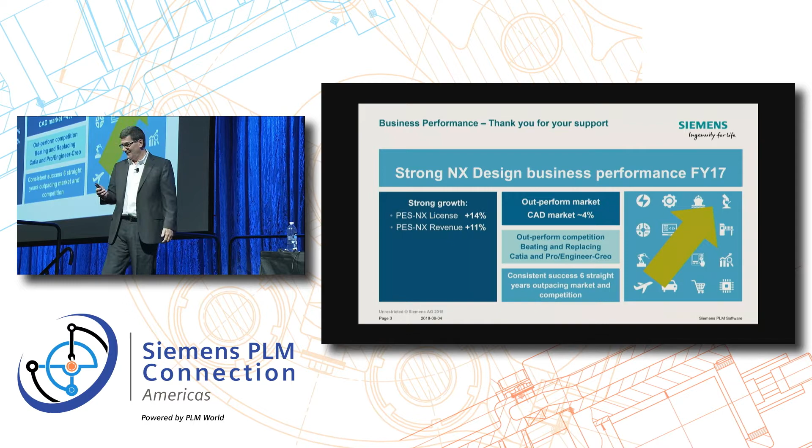I'll be presenting some of our strategic initiatives, and we have one big main strategic initiative that we're announcing at this conference for the first time. And that is, how do we deliver innovation faster to you?

We hear from you that we don't fix bugs fast enough. We don't get the functionality that we talk about at these conferences to you fast enough. And as end users, you just don't see it.

Even if we totally release a new product, on average it takes our customers 3 years to actually see that product. That's too long. There's no app you're using, that your kids are using, where it takes 3 years. They release functionality, they get it that month. You release functionality on Windows today, you get it that month.

So we're going to a whole new deployment strategy for NX that will allow you, if you wish—it'll be optional—to deploy NX continuously. So this is our big strategic change that we're doing, and we've been preparing for it for years.

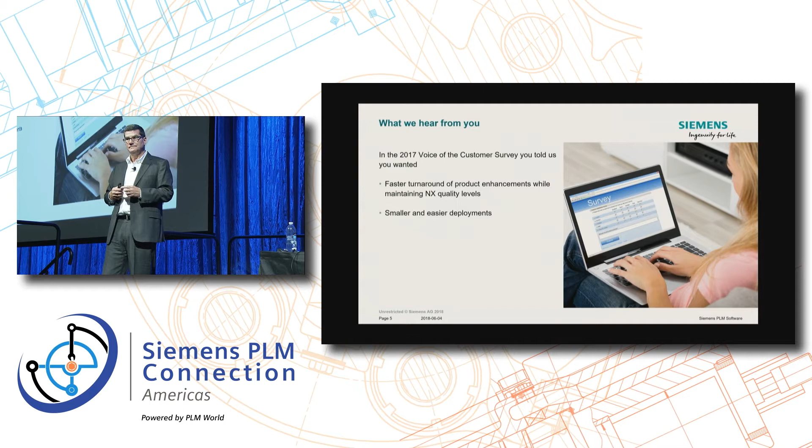Our software development is getting more agile. There are no more MP patches, as we'll discuss. The software just rolls out, just like all other software you're using today. It's backward compatible within a certain time frame. I'll take questions in a little bit, and there's a whole session on this in more detail. This was just sort of the teaser to get you excited about it, learning about it, and understanding how we're actually going to deploy it, and confident we are deploying it.

So, what does Agile mean to you? It's a software methodology, and those of you that develop software know that. But what it more importantly means is that you get functionality faster when it's ready, and you don't have to wait. One of the problems we've had internally is when we have releases every 15 months, if a project is close but not quite ready, it either goes in or it has to wait another 15 months to go in. And then on average, it takes 3 years before that enhancement is deployed. There's nothing agile about any of that.

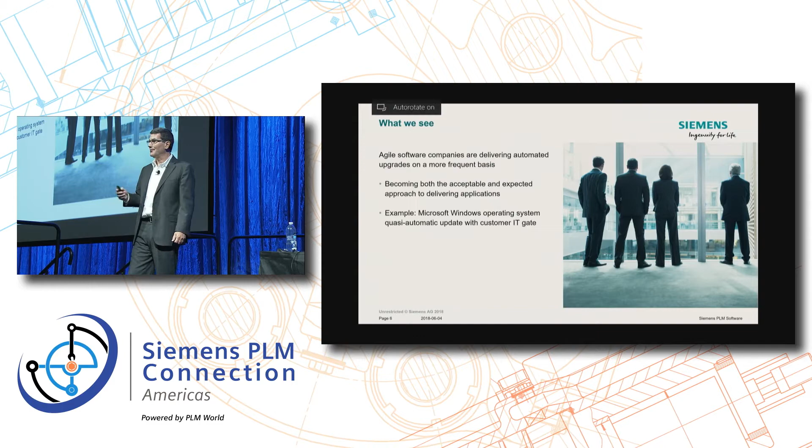What just happened? I don't think I pressed anything.

Okay, so every release of NX will be ready to be deployed. Never think of a 0.0 release. Anything that was at 0.0 quality and not ready to be deployed by 100% of our customer base will never be released. It might be tested by certain customers, it might be released to selective customers on an early test basis, but it will not be released as part of the continuous upgrade. Okay?

NX is not just NX as a CAD system. NX is a platform. All of our graphics applications, many of which, whether you see it in Teamcenter, whether you see it in manufacturing solutions, whether you see it in our CAE tools, are all based on NX as a platform. So this platform methodology will go out everywhere, across all of our tools.

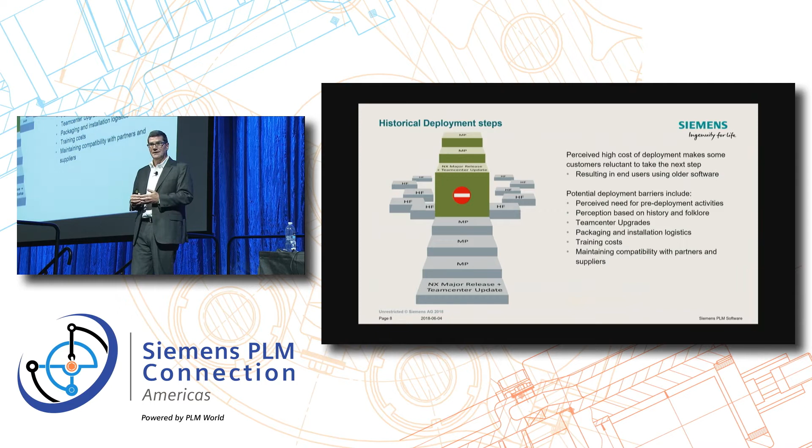But if you want to leverage this change and leverage these enhancements, you can go to this new deployment strategy of our software. And this is NX as a platform, not as NX as a product.

So those of you on NX 10 or earlier, that's half the audience. Do you know when we worked on NX 10 as a development team? I actually don't. What would be your guess, guys? When were we working on NX 10? 4 years ago? 5 years ago? 5, 6 years ago? We released the software half this room is using. When do you think any Amazon software you're using today was worked on? You're using software they worked on last month. Windows 10, you're using software they worked on last month. Not 5 to 6 years ago, right?

So you're missing the work that we've been doing in that time frame. Because of the NX growth, the NX staffing has increased tremendously, so our functionality is improving. We've hired over 100 young people in the United States in the last year working in product development. We hired another 100 in India, China, the UK and other places. So our staffing numbers are increasing, and our functionality is increasing, as you're going to see here really quickly.

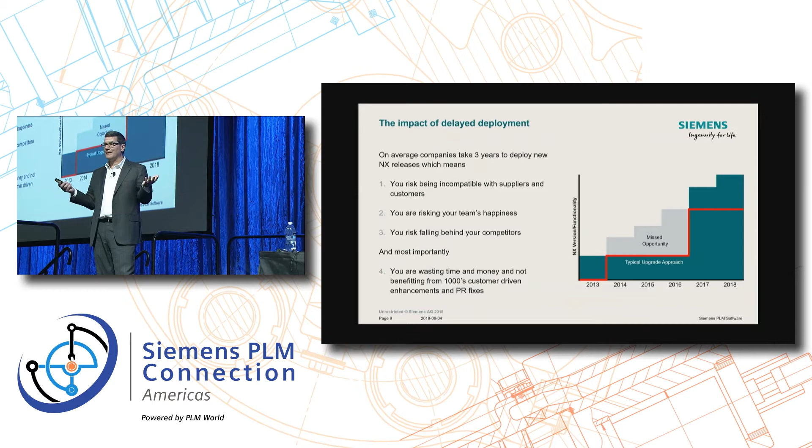So what's given us some confidence we can do this? I want to get some smaller company names here, even though you wouldn't recognize them, just to make sure you know this is really across the industry board. Daimler deployed NX11 within 4 months of its initial release. Daimler's our largest single customer in the world, with the most active seats of any customer in the world. And they're a bit of a complicated customer, for those of you from Daimler here. They deploy a new release of NX every 6 months.

GM deployed NX11 at half the cost of its previous deployment. The GM CIO, in a meeting with us after this deployment, actually had a really funny line that I'll never forget. He said, you know, one of my main jobs is to always holler at our suppliers and complain to them and push them to do better. But you exceeded my expectations here, so I just want to say thank you. It doesn't happen a lot.

Any of you that are not using NX as a product, and you're using NX as a platform and one of our competitors, tell me whether you've deployed the latest release of their software at half the cost. Have you achieved that? I doubt it.

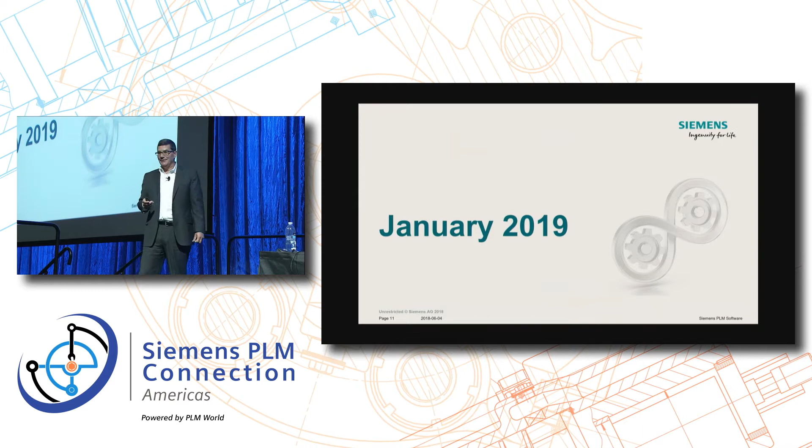So when are we starting this? We're starting this in January 2019. It's called NX Continuous Release. Again, I want to make sure you all realize it is optional. You can turn it on or turn it off. But if you turn it on, you'll get functionality and bug fixes that are certified, verified, and up to date whenever you need it.

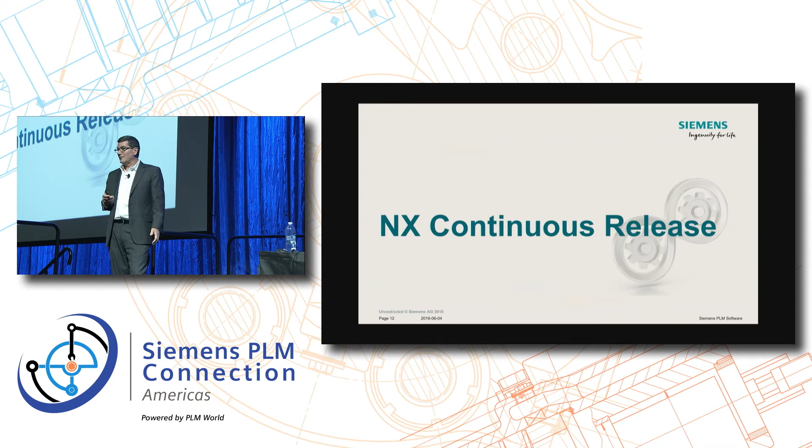So instead of the traditional model, you'll get a continuous step forward. And as long as you get finally to the version of Teamcenter 11.4, there'll be no upgrade of Teamcenter necessary. We will broaden our compatibility with Teamcenter to the absolute maximum that they'll allow us to support. So all versions of Teamcenter will be supported with all upgrades of NX, as long as it's in the support window of Teamcenter.

And what we hope this achieves for you is higher quality software, all releases production deployable. Even if there is a problem, we can go backwards. Continuous release means we can continuously pull stuff out if needed. It's just a much more modern, flexible way to deploy our software packages on a go-forward basis.

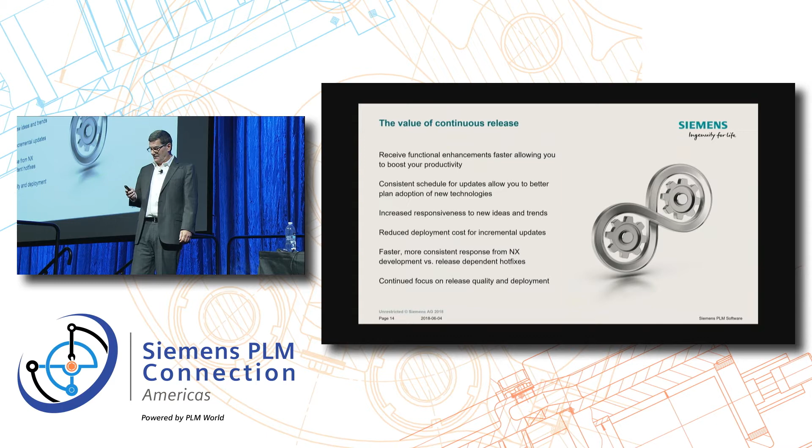And our commitment to you is that we will deliver the highest quality products. I just had an all-hands meeting with our development team in Milford, and many of the people here will tell you the number one thing I drill into all of our developers' heads is it has to be right the first time. If you have any doubt, it can't go out, and you can't just rely on our million automatic tests. You have to really think about the code. You have to really think about the interconnectivity.

That's our commitment to you, that we'll deliver that, and that you'll have an option to go to NX on a continuous basis so you can get the latest functionality as soon as it's available anywhere.

Now, what have we done recently for you in the last year since the last conference? Paul will tell you.

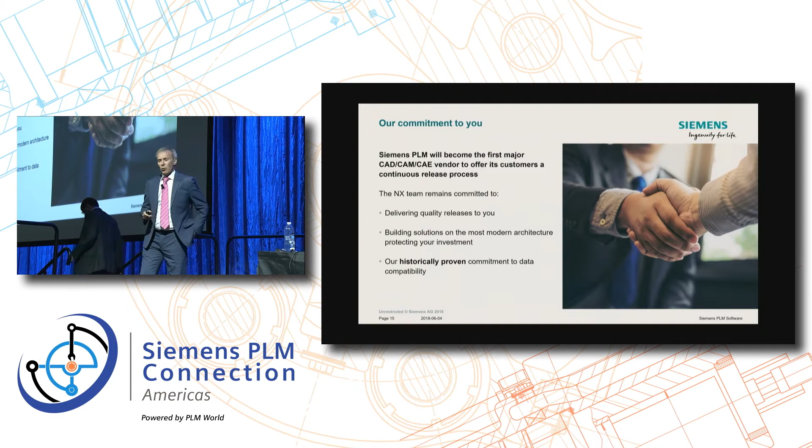Good morning, everybody. It's still morning. So what we're going to do is take you through a few things that you're missing out on based on the show of hands, but also give you a chance to look at some of the values of things we've been working on.

I'm joined by Paul Bevan. Many of you would have seen us present before if you've been here in the past. Also sat down in the corner, being very quiet at the moment, is Sam Kwan. He's going to do something towards the end of the presentation.

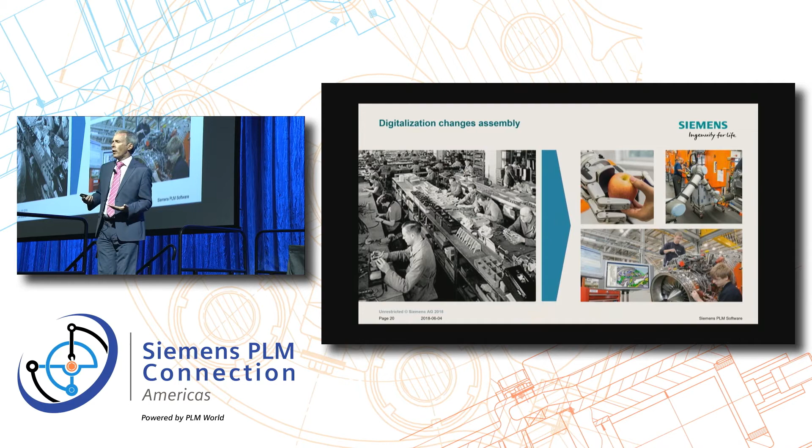Let's go back a little to when Tony presented first thing this morning about digitalization. Digitalization is changing everything in every one of our businesses. Products are becoming more complex, and the strategies of digitalization are changing everything—it's changing verification and testing, it's changing production, it's changing the way you assemble products, the whole process.

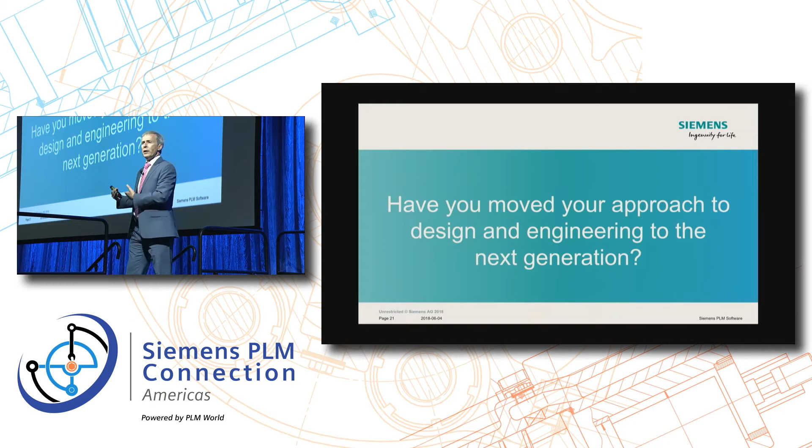So my question to you—it was kind of scary with the show of hands—have you actually started to move your approaches to using software to meet this next generation that you're going to need? If you are still using NX, whichever version, even if it's NX10, as if it was NX6, the answer to that question is no. Because we constantly keep giving you new technology, new approaches.

So let's go through those. The goal really is to meet this platform—Bob mentioned NX as the underpinning platform for graphics and product development, the actual development of the digital twin, building that digital twin model, getting the information into it. We believe there are six key elements that we deliver to you.

We deliver the most productive modeling environment. And we don't just mean one function versus one function—we're talking about the workflows you work on. We are constantly looking at the workflows that you go through.

Multidisciplinary, being able to connect mechanical, electrical. New and emerging technologies like generative design, and integrating the validation processes, topology optimization, those types of tools. Going into additive, keeping this all collaborative using our ties with Teamcenter. And you'll see a bit later some work we're doing around immersive.

One important point we really want to make—one thing we hope you don't go away from these conferences thinking is that all we're focused on is new things. We are committed, and we remain committed, to delivering the core modeling technologies that are the cornerstone of your day-to-day work, and to making those the best and most productive we can.

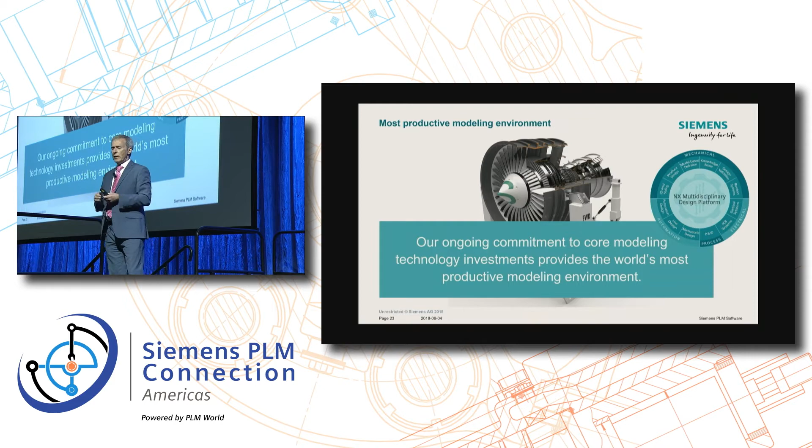In fact, in NX12, we had over 45 patents granted in what was built into it. Some people ask us how many ERs we close. Well, in the NX12 development cycle, there were over 2,300 customer ERs. So for those of you who submit ERs thinking nothing happens with them—it does.

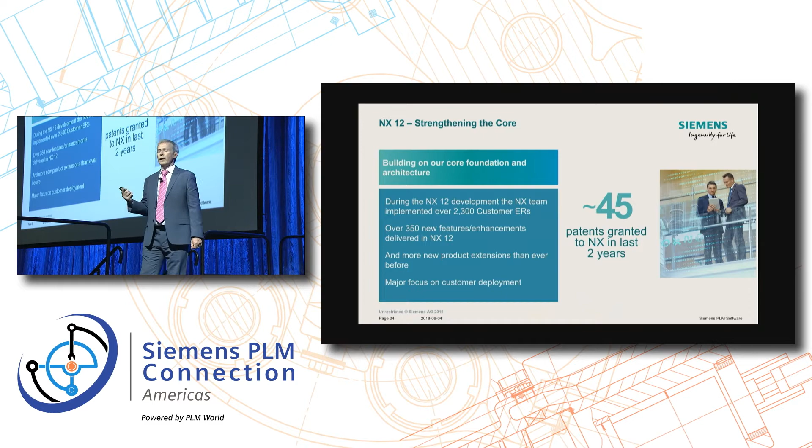We actually go through and track them, and increasingly we're doing more tracking of ERs to make sure you understand when we've addressed them. Well, let's get onto a bit more technology, because it's more fun. Then we'll get onto some demos too.

Assemblies—you would have heard in Tony Hemmelgarn's presentation one message, hopefully you'll take this away. Everyone that uses NX, I'm assuming—I'm almost scared to do a show of hands—how many of you deal with assemblies that are 10,000 components and above?

Okay. Bigger than that? 20,000? Right. Okay, so between 5 and 10? Yeah, so it's a real fair mix.

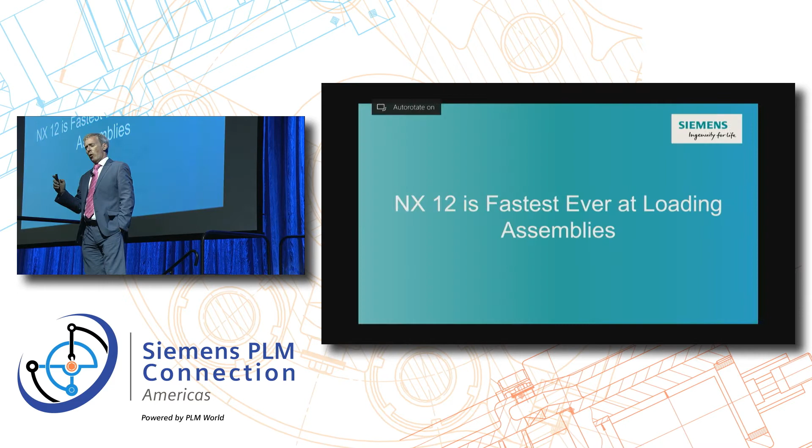So one of the things we've focused on, which we hear quite often, is assembly performance—how quickly can I get into the context I want to work with? Well, we can tell you now that NX12 is the fastest ever release we've had at loading assemblies. Now, that's a bold statement, but let's show you what's going on.

Okay, so we're now over to Paul. Now, one of the things that was interesting is Tony showed you this truck. It comes from an Eastern European truck, actually. And in the background, we're going to load this in an older version of NX.

And we've started the load going. Same machine, we're going to now start the same load. We're going to switch on the option of using the new minimal load functionality. And Paul's pressed load, right?

So we got 2 running. We gave the old one a head start. Remember that? We gave it a head start, just to be fair, we got to try and level the playing field.

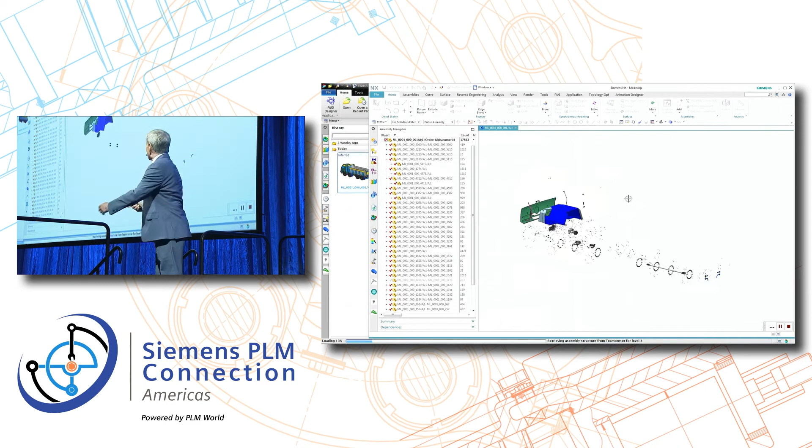Already you can see the navigator's up. You notice the navigator in the back session hasn't even appeared. You can start expanding it. The graphics are going to start kicking in. And then what you'll start seeing... I'm looking at Paul asking, where am I? There we go.

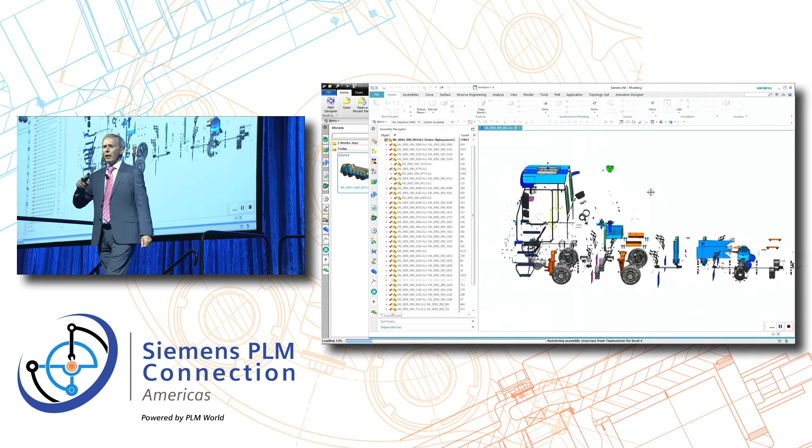So you'll start seeing, but this is not just display. We can interact with the display. We can start doing things. Paul can start selecting out, saying he's not interested in those parts. Let's just hide those. We're still doing the load. This load is still streaming down, but he's now being able to pick information out. He can navigate up and around in the assembly navigator.

Notice the back session, the old session, still doesn't have an assembly navigator, so we've still got some work to do there. It's just going to hide the engine just to bring this forward. We're going on, we carry on.

You can pause the load at any time. You might say, I've seen enough, I've got everything I need. I can pause it and then stop the load at that point and carry on working.

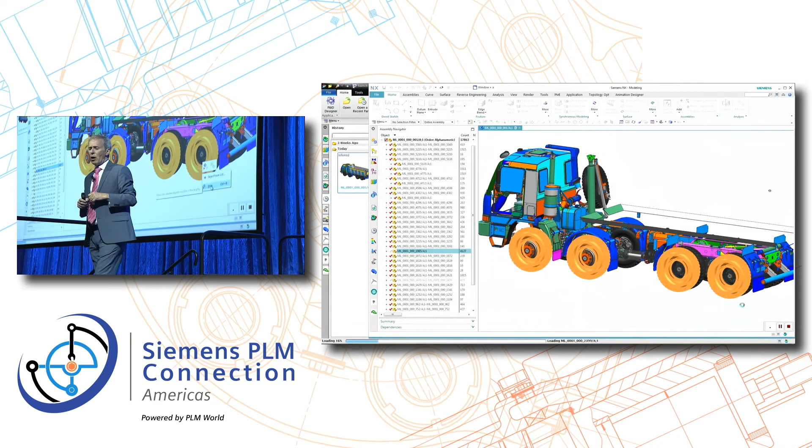Or you can pause it and then go off and do some hide. Paul's just picking these wheels. He's going to hide them, and then he's going to let it go running.

The reason you might want to pause things at times is because, of course, we're constantly streaming information down. So you might be trying to pick something, and then all of a sudden something pops up where you thought you'd just removed it. But anyway, so we're going off and doing this.

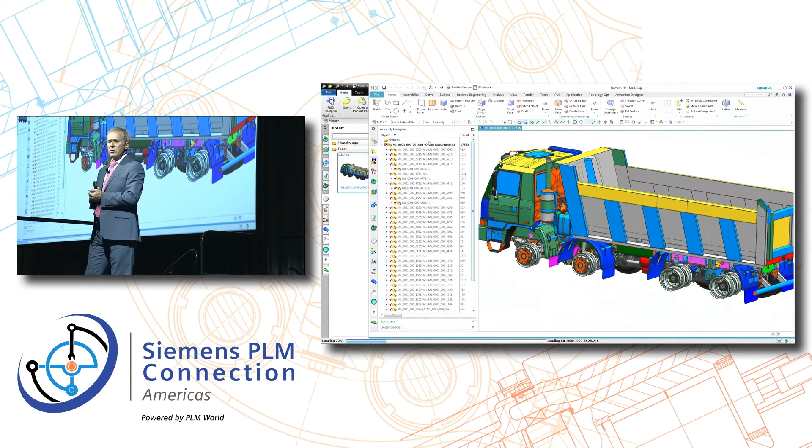So one of the things Paul can do once this is loaded, this is important, right? People are going, well, is it just graphical representation? What can I do with it? Am I just getting this down as a streamed display? Well, one of the things Paul can do at this point, let's have a look at this.

He's just reminding me. One way you could possibly do this is just throw up the outside of things. What you can see, hopefully, as he sections through this, is all the interior detail. We didn't just do a shell around the outside of the assembly and just throw that on the screen. This has got all of the components.

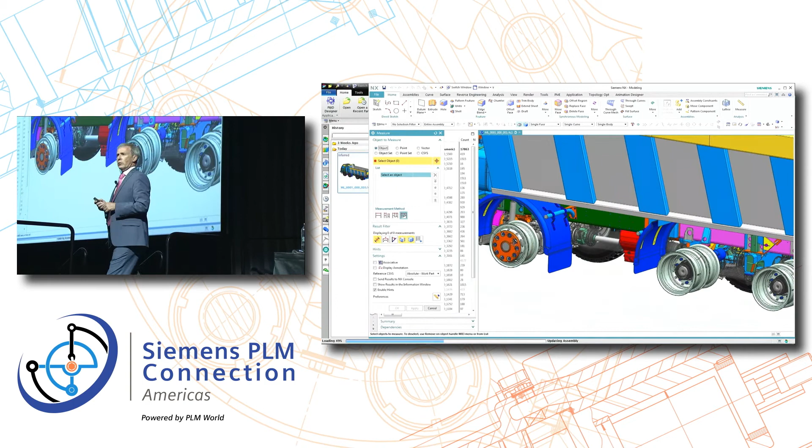There are 860 components there. I've come into his session on screen.

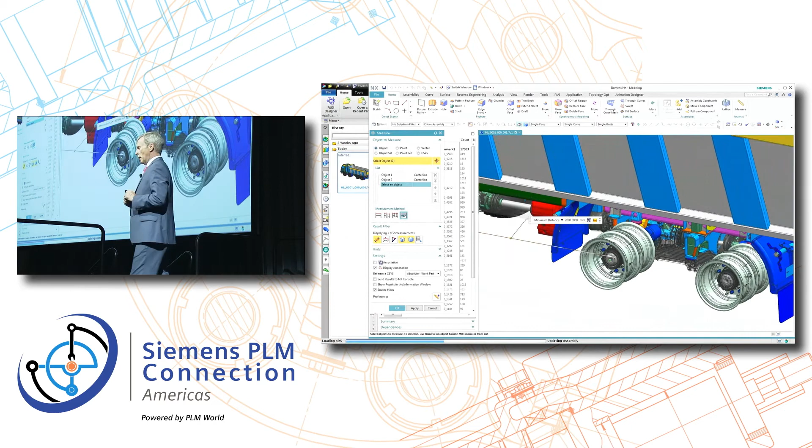And now what he's going off and he's doing some measurements. So he maybe wants to measure the wheelbase. He's using the new measurement functionality that Taylor Anderson would have shown you if you went to his session, the 10 o'clock, 10:15 session. So we've done a whole bunch of work with NX12 around measurement, made it much easier to use. We've consolidated our measurement functions.

One of the things Paul's now going to do is do a little bit of work. Can he actually do some modeling work in this? Well, we're going to go through, we're going to make that the work part as usual, and then just go off and we'll just move this up.

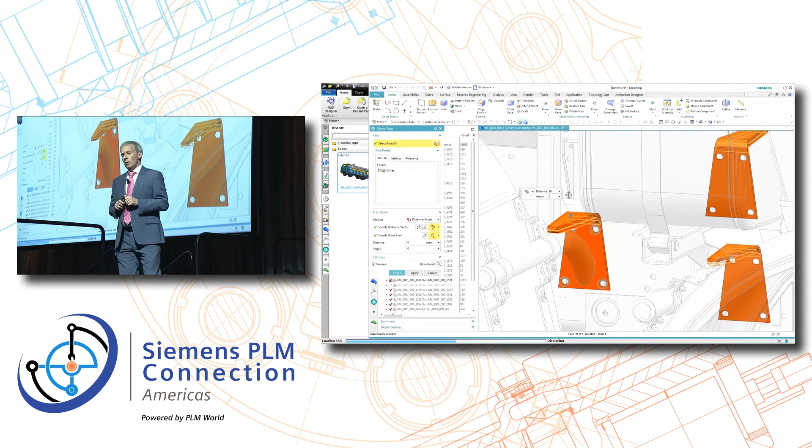Make a quick change. Now at this point, Paul could say save, in which case then we don't have a demo for tomorrow, which would be a mistake. So he's not going to do that, but he can now actually exit this.

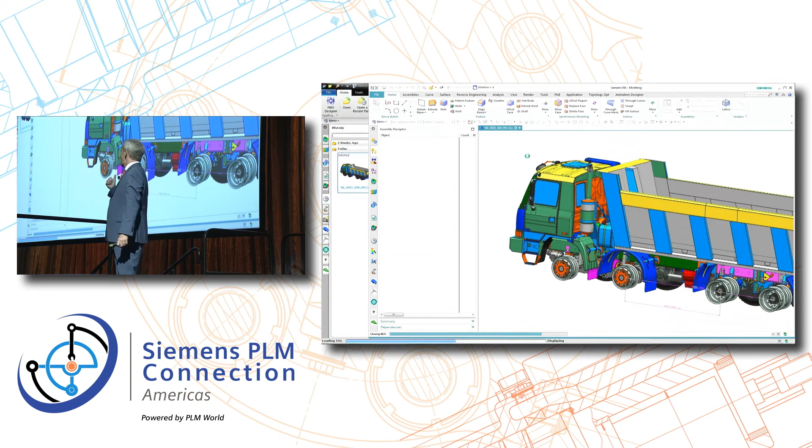So let me just recap. We've loaded all the components, we've blanked some out, we've actually done some measurements, we've done a modification, and the old system still hasn't loaded. So we've done our work, and we're out. So that's why we're telling you NX12 is the fastest ever at loading assemblies.

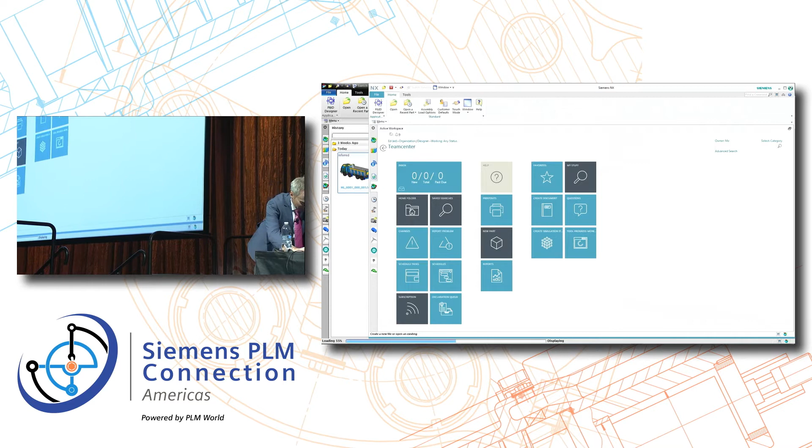Yes, that was live. Sorry, that was a live demo. So, when am I going to get coffee now?

Precisely. Now, we've done other things in productivity, just to make sure you don't think that's all we focused on. So a couple of things we've done—oh sorry, Paul, can you put the slides back up, mate?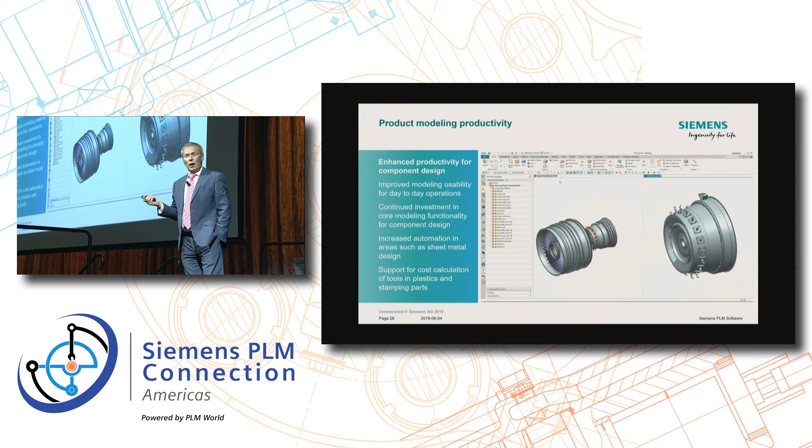One of the functions we added in NX12 was box selection, which allows you to very quickly navigate down. You would have seen—I'm running out of trying to remember when we brought in things like multiple display parts, but we brought that in here. This is showing that, once again in 12. You can see Paul dragging out and reorganizing the windows.

For those of you who think multiple display parts, who cares—how many of you use multiple monitors? Right, so when you use multiple display parts, one of the big parts of that project was to make it work really well with multiple monitors. You have the perfect solution now, allowing you to control that.

Well, that's still working, so I don't bother about that. On my monitor down here, it just told me the one-way control IR blaster has stopped. Tells me something, I guess.

So one of the things you saw was Paul dragging and dropping geometry between windows. He's now using a function for those of you who do sheet metal. In NX12, we added a thing called Multi-bend Bracket—it does what it says on the tin. The idea is to make it very easy to create brackets and support structures with a single command.

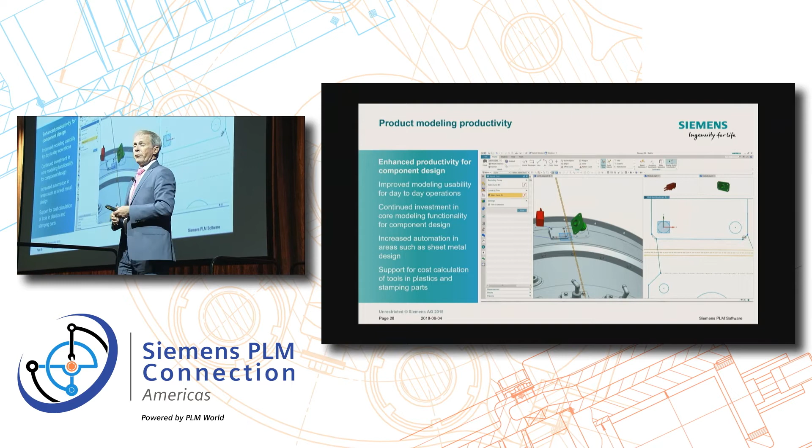What Paul did, when he created this movie for me, was pick up some faces, done a few little bits of sketching, and in a minute you'll see the 3D model get generated—he's done very little work. He hasn't gone sheet metal, flange, another flange, bend, flange. Single command allows lots of wrapping around, and you see the shape all wrapped up, and of course we can unfold that.

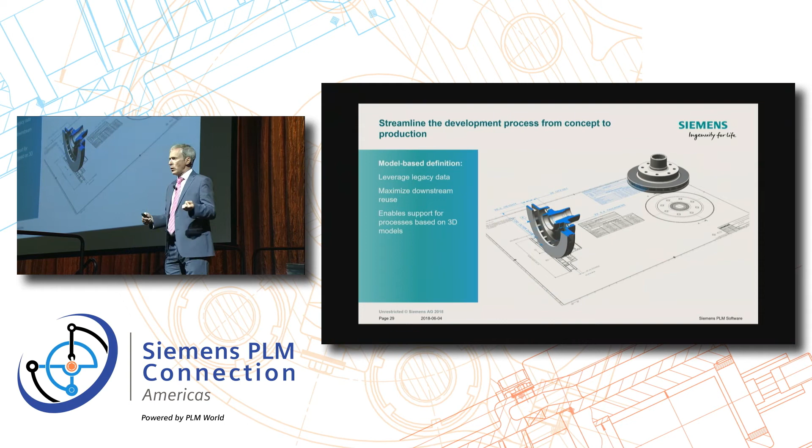We continue to invest in things like model-based definition—our work around product PMI and building in 3D annotation. Dave Wingrave has a number of sessions on that topic, this time with some round tables to continue working on that. Key initiatives.

Now, another thing we've done came out with NX12. A lot of times, my background originally—before I got involved in this—I worked for a machinery company. I trained as a machinery designer. Our machinery moved, it didn't roll around—well, not unless we got it wrong. It was actually bolted to the floor, but the internals moved.

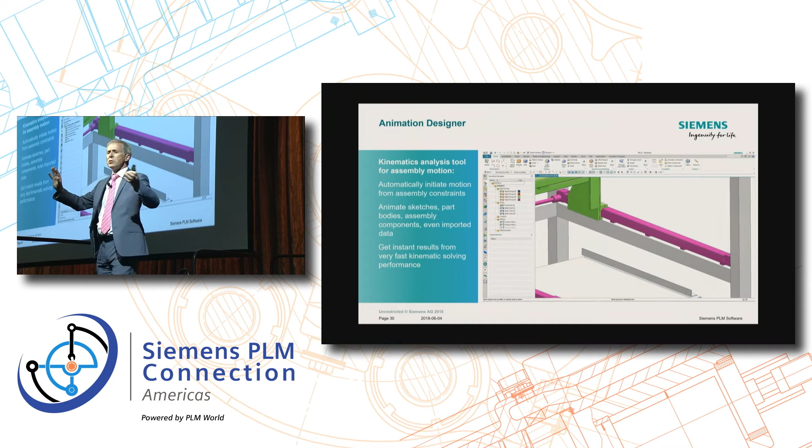One of the things we find with a lot of you is you say, okay, we want to have moving parts, but we don't want to go through a full-blown mechanism analysis. I'm not bothered about it, I just want some simple motion. I've got my assembly structure.

But now we have a solution called Animation Designer. Animation Designer doesn't worry about your assembly structure. You can build up complex movement, do some simple movements around joints and drives, and now you can see it there.

The beauty of this as well is it's time-based. So one of the things you'll see in the movie in a couple of seconds is we get a Gantt chart, and on the Gantt chart we can start sequencing. We can readjust the movement, adjust the speed everything moves in. The idea is to prove out your design without having to go off and do a whole bunch of work.

Defining joints and going into full motion analysis—it allows you to feed NX motion, so you can take this to the next level if you want to do advanced kinematics and then go into structural analysis. You can do this as your first pass motion.

But now you can see this thing comes down, it goes back up again, all just working together. It builds on top, it doesn't take any notice, it doesn't care—your assembly structure is not a restriction. You can build the rigid joints. We will take into account your linkages from your constraints, but also we can build the animation.

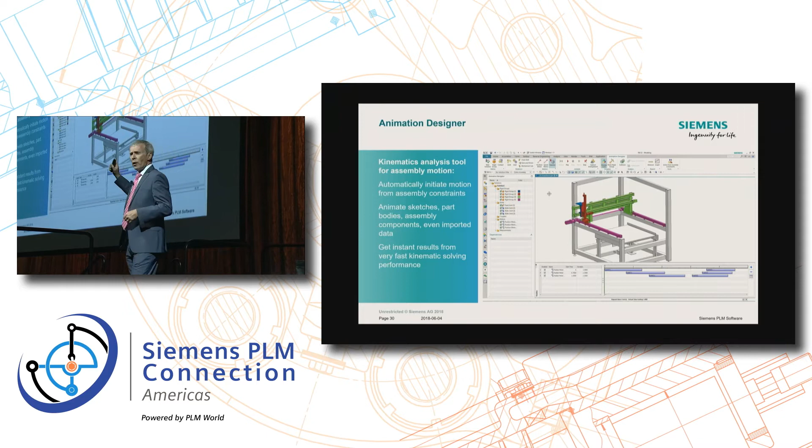Dave Walker, I think, has a session on Animation Designer tomorrow. So if you want to go and see a lot more about Animation Designer, he will cover that.

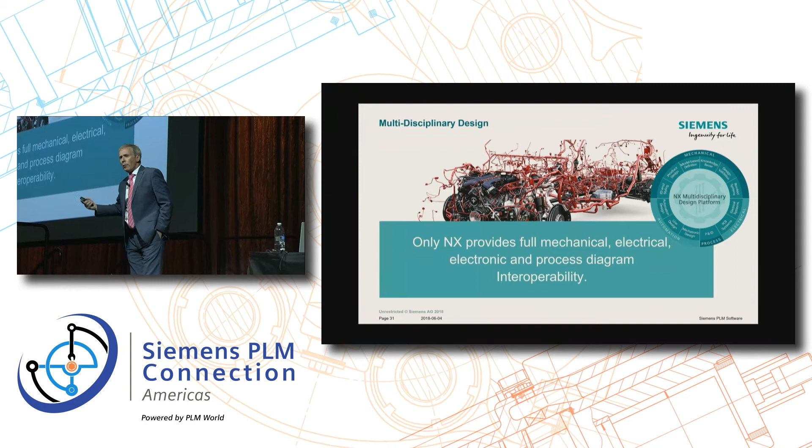All right, multidisciplinary design. Talking about integrating the other processes, not just mechanical design, but bringing in more processes.

In NX12 we introduced a solution for those of you doing energy equipment, plant, or marine design. Quite often when you're doing piping, particularly big pipes, you start life with a process and instrumentation diagram. This is the logic and structure of that 3D pipe. So we've built inside the NX framework a solution for process and instrumentation diagrams, closely coupled with the routing, so you can cross-probe and validate that your runs are correct. That takes it into that type of world.

But that's more process or industry orientated. We continue as well to look at electronics, tying together MCAD, NX with other tools to complement solutions like PCB Exchange, which allows you to communicate and pass PCB boards and layouts backwards and forwards.

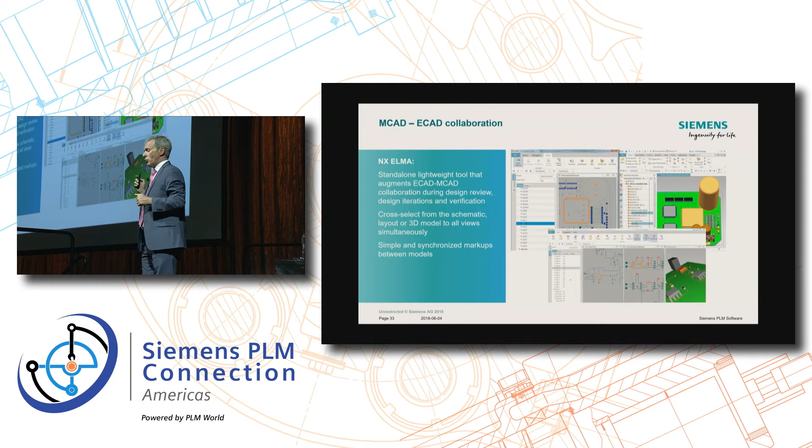We've introduced a new product called Elma. It's an interesting name, but you can ask Mike about that one. It sits outside of NX and connects between the PCB system, schematic system, and NX, allowing cross-probing and validation. It lets you check out your entire workflows. Dave Walker's got a session this afternoon where you can go see a lot more about the electronic integration.

Last year we introduced the first step of our electrical integration with the Mentor tools, the capital harness tools. We've continued to invest in that, bringing those two products closely together, giving you solutions which tie capital harness with its logical layouts and schematic into the 3D route inside of NX for your wire harness. Very close coupling such that you can cross-probe between each other and track information, track where signals go.

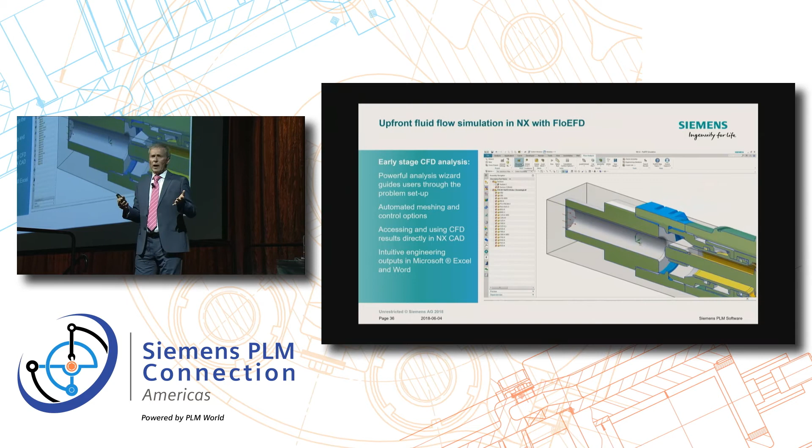Moving on, in that same area we have a solution. One of the things that many of you, if you're into anything to do with fluid, or if your products have cooling properties, quite often you need to worry about airflow or fluid flow. That's traditionally been the domain of analysts using CFD packages, and yes, we have products like Star CCM Plus, which are very high-level CFD solutions. However, there is the need for a designer-level tool.

So we're pleased to announce that as part of the partnership with Mentor, we are offering a product called FloEFD for NX. FloEFD is a wizard-type approach, embedded inside of NX, inside the design environment. You don't have to care about meshing or all that complex stuff. It does all that, and allows you to define.

In this case, we defined pressure at this end, out to atmospheric pressure. You can see all the flow curves, you can see where there are dwell points, where the liquid is going to slow down. So there's lots of capabilities to allow you to validate at the first pass—an early validation of fluid properties using a really simple interface within the design environment. It's not designed as a high-end analyst tool, it's there for you as a designer.

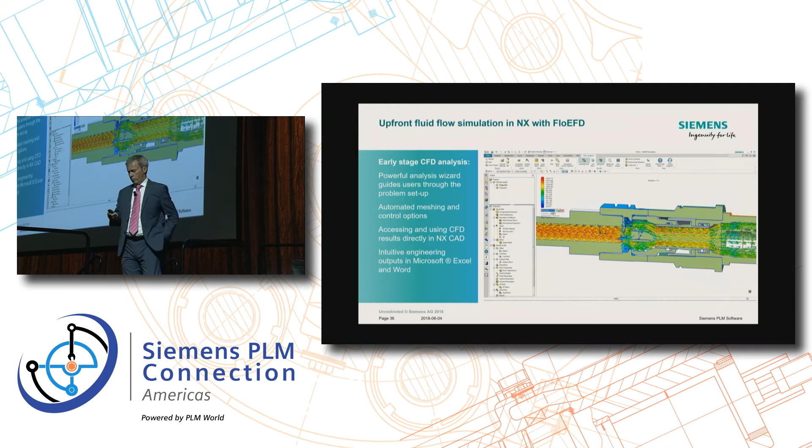Trying to work out if everyone's shell-shocked yet and how much more I can bombard you with. Okay, let's carry on. So, generative design and integrated validation: the ability to allow the system to help suggest potential designs and give you some options to work with. We've really been focused on a workflow.

As Tony Hemmelgarn mentioned this morning, just having point solutions, just having individual tools, that's not really where it's at. To be productive, it's the process that we have to connect together—from having your requirements, going through and doing your optimized design, making modifications and updates, right the way through to final manufacture, in one system without data translation.

When Tony told the Bugatti story—we'll talk a lot more about that tomorrow morning in the Jim Rusk session—one of the key things they wanted to do was keep in the same system and not translate data. I'll say this repeatedly: even if you get a niche system and they say we have a free NX translator, free is not free. There is nothing in life when you translate data that is free. There's always work to validate. Keeping in the same system with all the connections is the way to go.

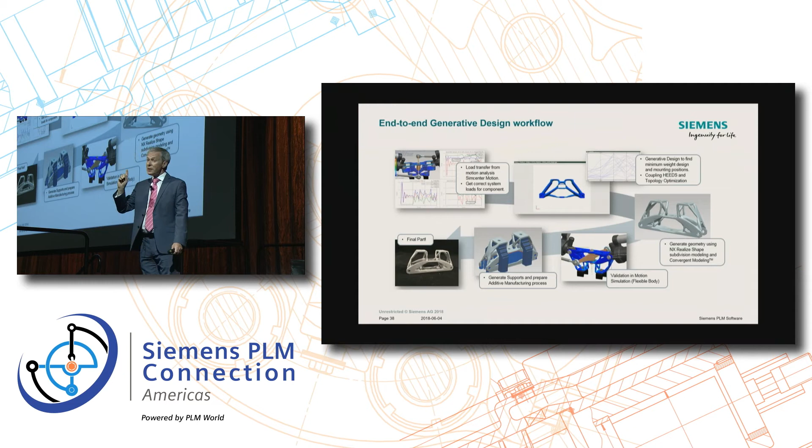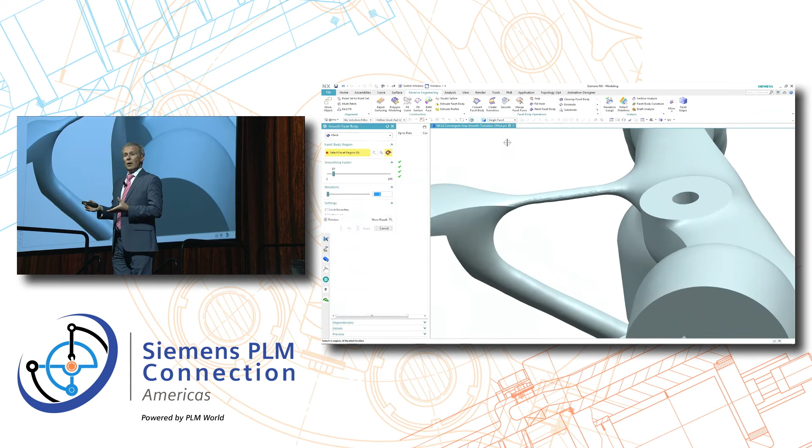So we're going to a demonstration. We're not going to take you through topology optimization itself, but we'll talk about what you can do with the results. Topology optimization brings out a facet body. For those who've been around a while and keep an eye on our messages, one key element is convergent modeling, which allows you to combine facet geometry and B-rep geometry and work with it. We've done a lot of extra work on how you can handle facet geometry and all these millions of triangles.

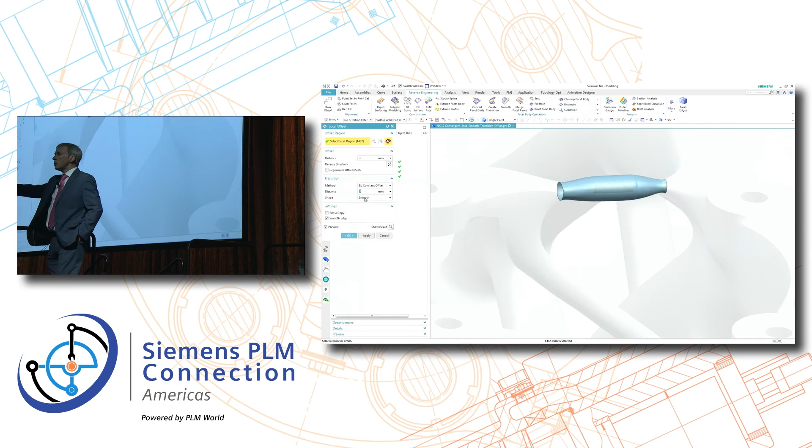One of the things you'll see is Paul going through this very thin area in the topology optimization, offsetting it and bridging it into the shape. We haven't done any conversion here—this is still working with facets. He hasn't actually changed the geometry. This is speeding up the whole process of taking your geometry, whether scanned or topology optimized, that's in facet form, and getting it into a shape you can do more with.

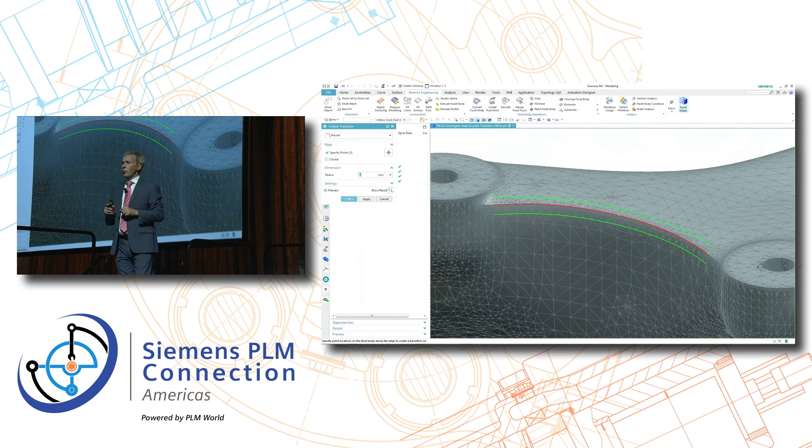In this case, Paul's going to add a transition—like a blend type shape—to take that sharp edge off. Everyone wanted to blend a facet body; you bring one in and it's pretty ugly. Notice he's got drag and drop for the points. He's just going to go through and make a nice, smooth transition on that edge. There we go—pretty cool, that one.

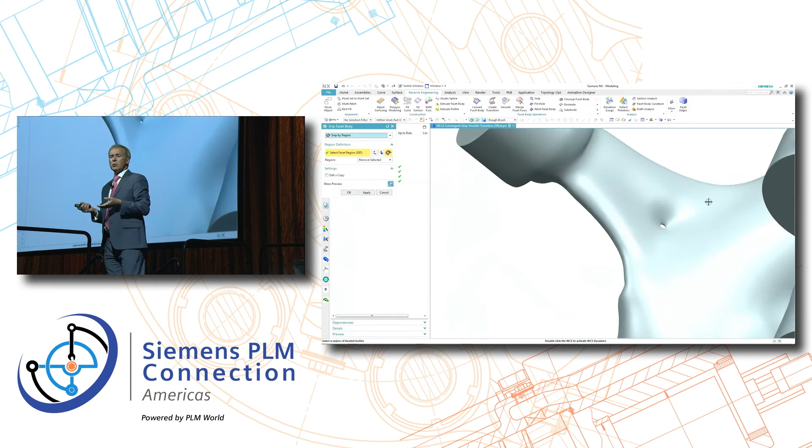Now, this happens quite often when you scan geometry. It also happens quite often with things like topology optimization, particularly if you've got a weight calculation. Because to get weight out, one of the things you can do is put some holes in areas. But that little hole will just be an absolute nuisance.

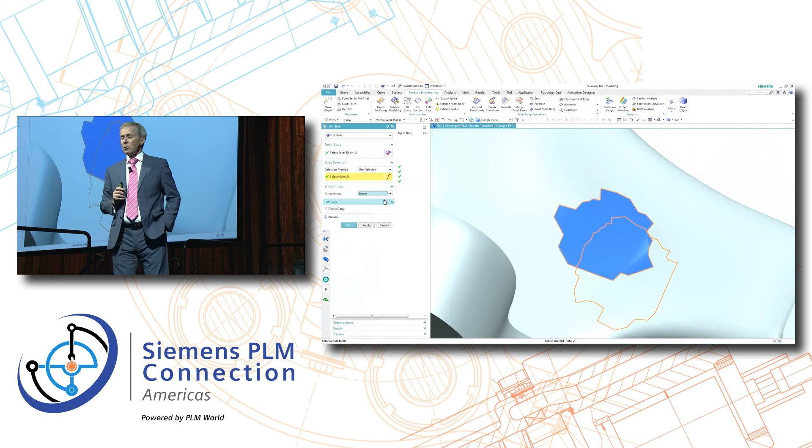So Paul's using a technique called paint—he's painting around the facets around that hole he wants to get rid of, and then he says snip. Now, at that point, every one of you thinks he's made it much worse. So what he's now going to do is fill the hole. He comes in, says fill, picks the two spots, and says make it all go smooth. Sure enough, the hole's gone, and he's got something much more useful.

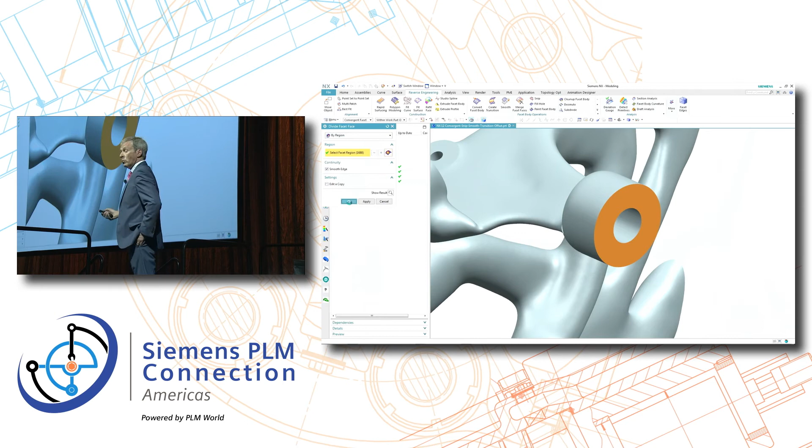One final thing on this one—this is a bit of fun. This edge is like a hard edge, pretty much cylindrical. So what Paul's done is divide the facet body up such that this is now a hard edge. And guess what he can use to make this look nice? Edge blend—the same edge blend you've been using for years. He doesn't have to worry about it; if it's a complex facet, we have the transition tool, but for a hard edge on a facet body, regular edge blend will work too.

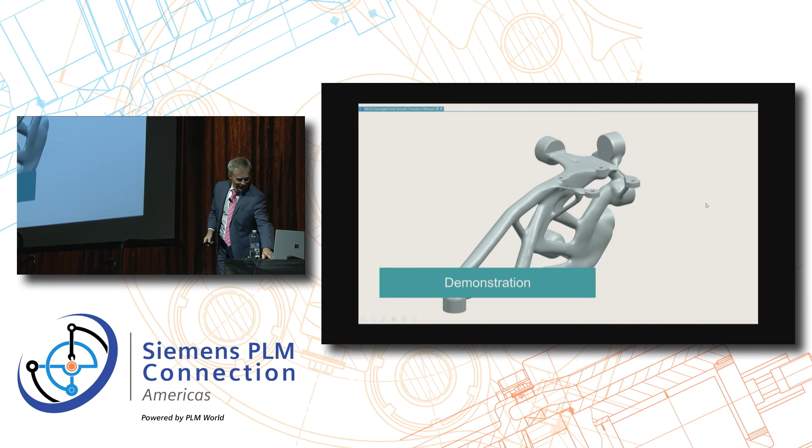So the whole idea of that was to make working with this type of geometry much quicker and much faster. Let me get rid of this. Is that live? Yeah—so Paul's pressing away quite nicely.

All right, design for additive manufacture—we'll talk about this a little bit. As I mentioned, the whole idea of our design process is to try and tie this together into a single system.

You can go find lots of niche systems that do individual parts of the additive manufacture process. Our goal is to give you a single solution such that when you make changes and new designs, they ripple through - a single solution, no translation, being able to work on things. I have wizards that are DFAM checks to make sure that what you're designing can actually be printed and manufactured, but also extra tools.

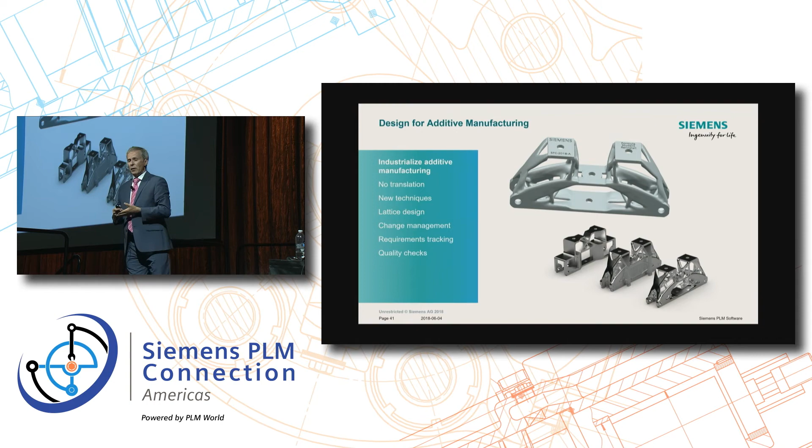So we're going to do back to another live demonstration.

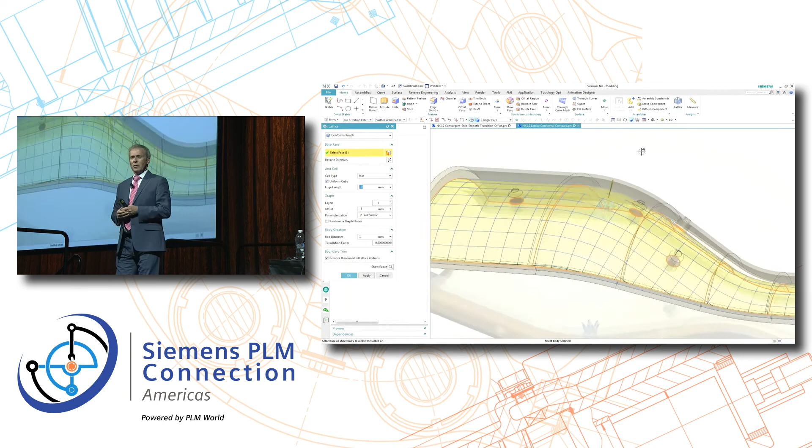One of the favorite things anyone talks about with additive, and one of the benefits, is this topic of lightweighting - being able to take volume out. Now, it's not just as simple as making it hollow, because that takes volume out, but the trouble is that impairs structural integrity. So what you want to do is take volume out and maintain structural integrity.

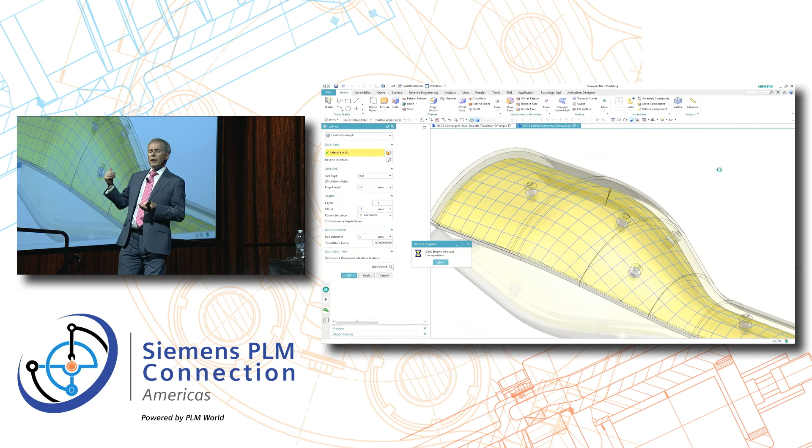So what Paul's done is he's picked that yellow surface in the middle, and then he's said, I want to go through, and he has a choice of lattice structures he's gone through. You'll see this grid that's come on here - this gives us the layout. In NX11, we introduced our first pass of lattice, and it was a unit lattice, so it was great on things if you wanted it all to be a regular shape, but on something like this, which was irregular and formed, it didn't help you. So now in NX12, we have conformal lattice, and you can see the structure.

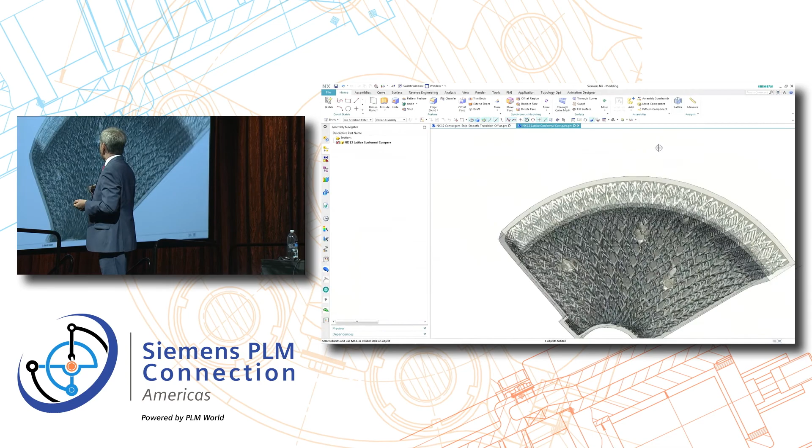Anyone want to have a go at modeling that individually? No, so I didn't think so. So you get this whole idea - we're giving you that tool inside of NX.

No translation, being able to then take it into the next stage of the process, go through, do your slicing, do your support generation, do all the work you need to prepare this for print. And I hate to imagine how many faces there are on that lattice, but of course the benefit is it's a facet body - and how do we use facet bodies? Convergent modeling, so we can combine it with our regular design.

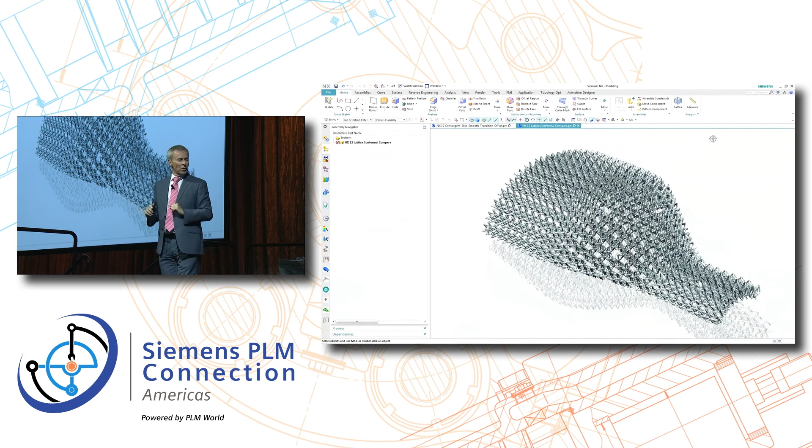All right, we're almost there. And it's almost Sam's big moment.

One other topic that is very popular at the moment, and when we talk to customers, is where are we going with virtual reality? Additive manufacturing is one big topic, and how can I get the benefits of virtual reality in my design? So we've been working on this - it's due out in July, a couple months' time.

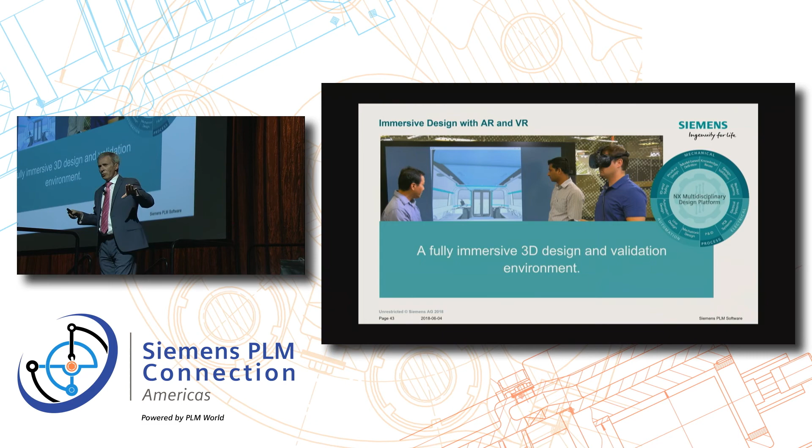So we have Sam here, and he's got his VR equipment stood down there - unfortunately there's no light on him. We're using the HTC Vive. Now what you can see is the Local Motors Olli, which is a mass transportation autonomous vehicle. The Olli itself is in the exhibition area, and the hardware will go down to the exhibition area after we've finished, so if anyone wants to come have a go at this, be our guest.

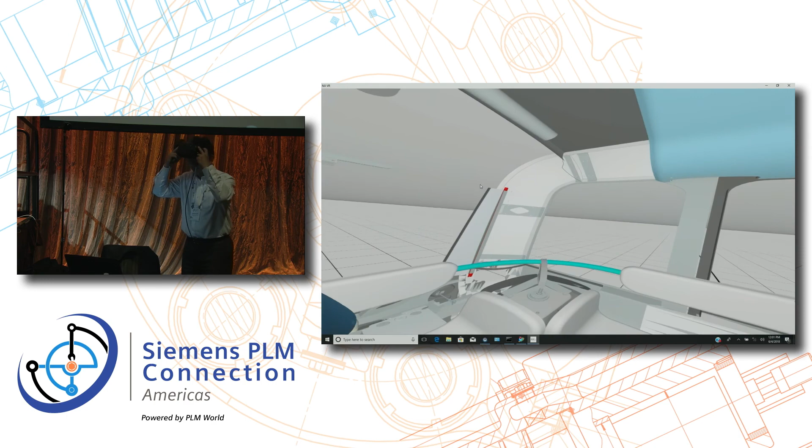Now you've seen that. Sam is just going up, and you'll notice we've added a straight switch. We don't want you to translate data out - what have I been saying all along? Trying not to translate and force you outside of NX. So inside of NX, we've gone there. Now at this point, we could all leave the room, and Sam has no clue that we've gone, right?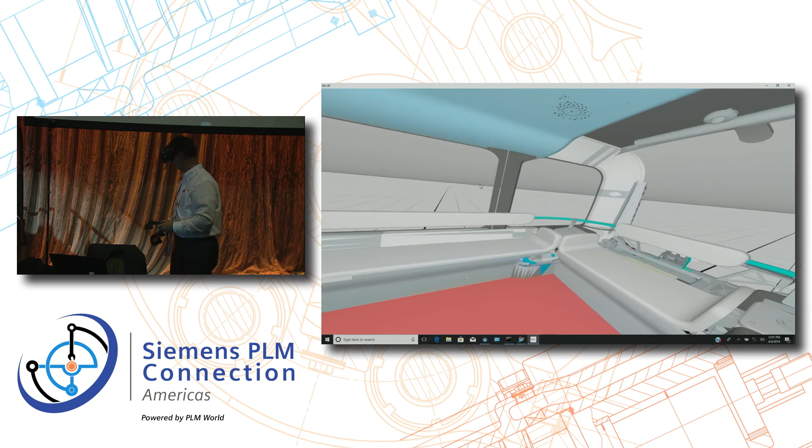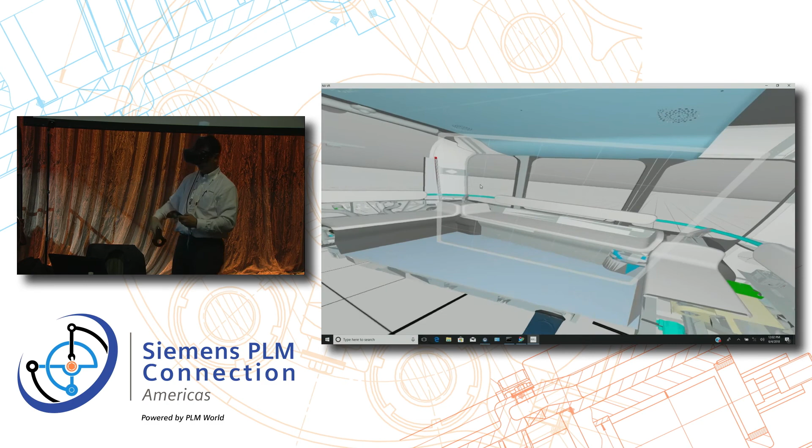But anyway, so what you can see is what Sam can see. So actually they've kind of got him up there. You can see he's gone in and he can move around. You can see what he's doing with his left and right hand - he's navigating around, he can pick things, he can do things like sectioning. He can go inside - so we're actually inside the Olli, and now we're going to go down. He's going to pick something, and you'll see the pop-up menu come up, and he's going to run a section plane through the process, so he can actually highlight areas. He can pick components and then go and interrogate more information, looking at going inside of his environment, picking one of these components.

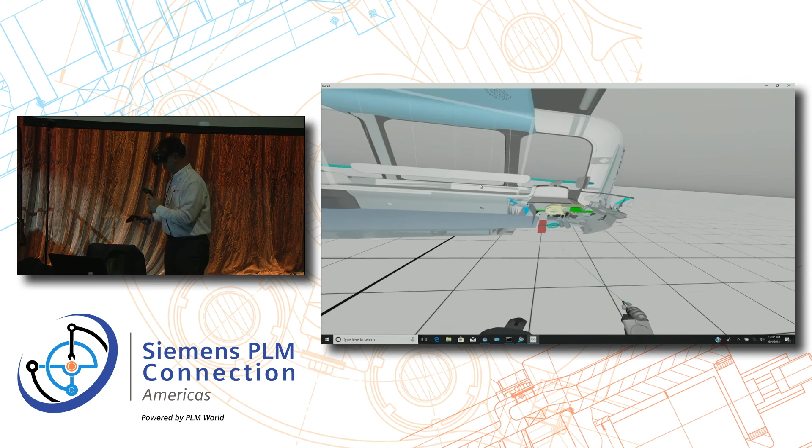You can see a tab comes up. It has things like part attributes, part number, materials you want to use. It's giving you an immersive way of going through and working with this data, making most use of it. Remember, we haven't translated this—this is inside of the NX environment. He can start adding more, he can pull up more information.

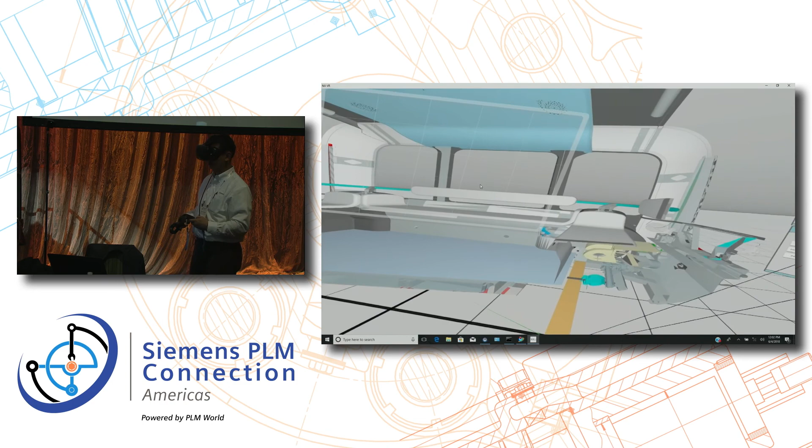Maybe he wants to do a bit of a measure for me, Sam, check the distance of something. The distance we're doing in this is not like the measure Paul did, which was precise. This is kind of a rough measurement that he's going to go through, and he's going to pick a couple of things—it's more like laying a ruler into his environment.

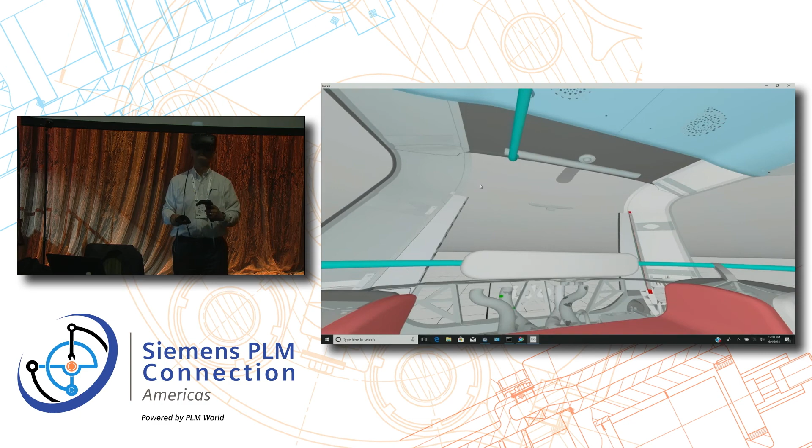So we've gone inside, we're going to check the distance between the two speaker points, I'll pick up on one of them. There you go, both hands. He's kind of roughly measuring this out, like using a tape, look. So there's the distance, OK? So 0.1 of a meter.

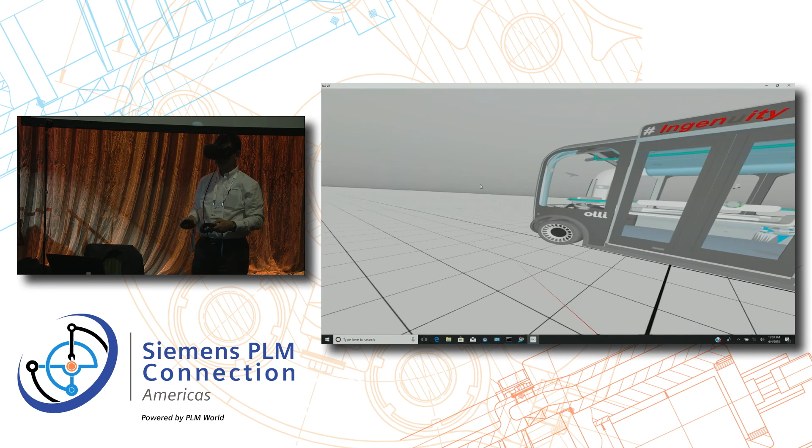There are lots of other functions if you want to come and play with this. One of Sam's favorite functions—we've added a new function called teleport. Unfortunately, for my age, when my kids were growing up we were into Harry Potter, so this is apparate, right? Should have been called that. But anyway, teleport.

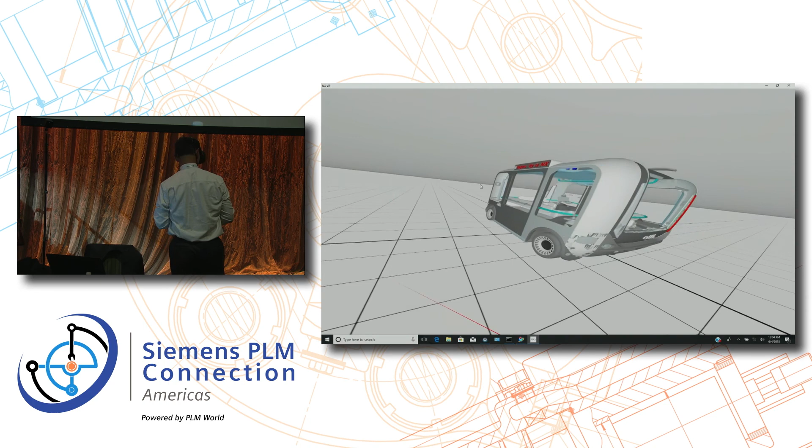So you can see what it's doing is taking Sam to where it goes. The main reason you want to do that, just so anyone wonders, is if I'm doing one of these reviews on a ship or in a plant, a factory, and I have to get from here to the other end of the building, there is a long way to go with a headset on.

All right, so it's easier to fly to that point, do the measurements, do the integration. We really could leave at this point—he's got his back to us, right? So a lot of work in there. I urge you to go, come over to the exhibition.